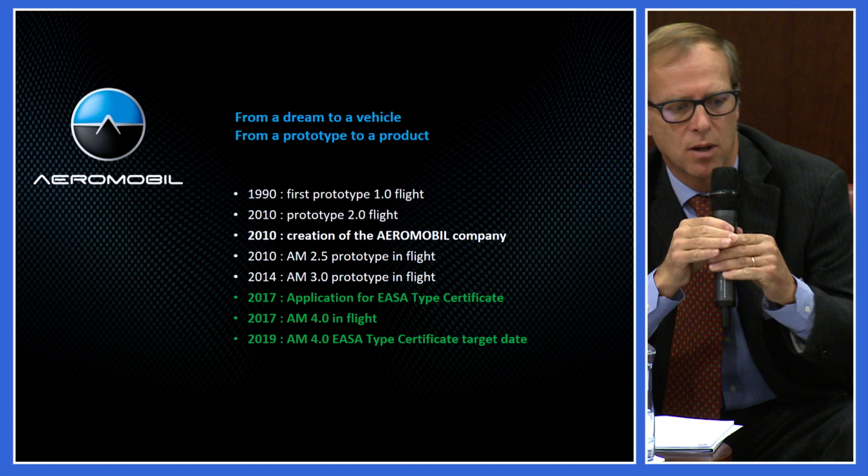The vehicle you've seen on this video is model 3.0, which flew in 2014, piloted by Stefan Klein, one of the creators of AeroMobil along with Juraj Vaculik. Technology means complexity and time.

As you can see on this slide, AeroMobil has a lot of innovation. It started with a dream from Stefan, which became a prototype, and then a few prototypes. All of those prototypes flew, the first one in 1990. They then built a new one, and in 2010 decided to create a company, turning the dream and prototype into a product for the market.

2010 was a very important date for AeroMobil, the creation of the company. Then they designed new prototypes. What would be the future? AeroMobil is designing a new, improved version of its vehicle. Next year we will apply for the EASA type certification, and have a new prototype in flight. We intend to obtain the EASA type certificate in 2019.

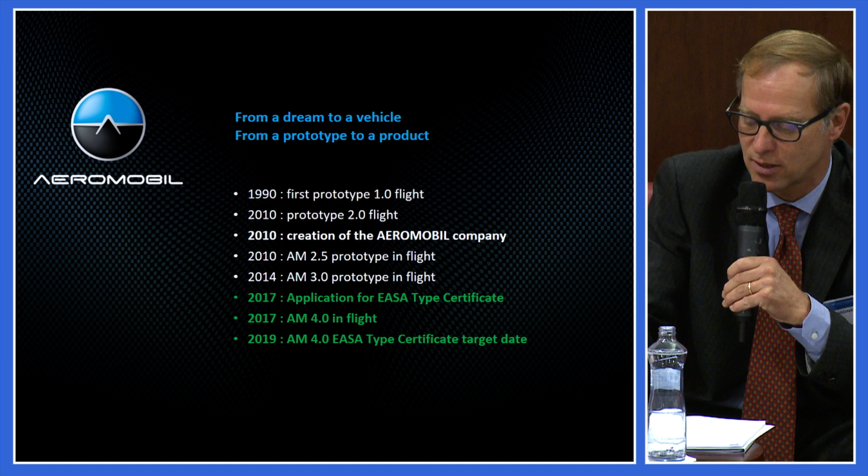This project is a challenge. What are the main challenges for AeroMobil? First, we need to obtain homologation as a car and type certification as an aeroplane.

This means two sets of regulations, perhaps some inconsistencies, but also in some cases, perhaps some good ideas from one side or the other.

We also need a propulsion system for the road and a propulsion system for flight. This is not easy. Controls are a big issue because the driver and pilot remain in the same seat in our design. In front of that seat you must have the classical car controls found in all cars, and also the classical aeroplane controls found in aeroplanes. This is a big challenge.

Aerodynamics is complicated because of car regulations, since the length of the aeroplane is limited. All the aerodynamics specialists in the room will understand the difficulty of designing what I could call a short aeroplane. It's a big challenge on aerodynamics. Simon and his team perform very important work on that.

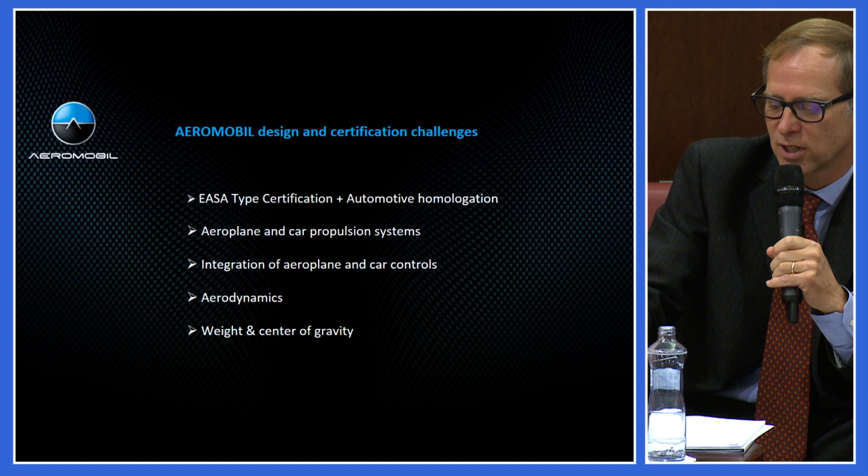Last but not least, weight and center of gravity. On a car you've got four big wheels and very nice brakes, but this is weight that isn't useful for the aeroplane. The center of gravity is also a big challenge, for both design and certification, because we will need to make proposals for the certification.

The AeroMobil 4.0 is a European light aircraft of category 1, which in the EASA procedure should allow some alleviation in the process. We will use the future CS23. The NPA has been published this year, and the new rule should be published by EASA before the end of the year. That's the schedule.

We will use this rule, and we'll be one of the first projects to switch from the old prescriptive rules to the new rules based on safety objectives. This is very important for us because with this new rule we have the possibility to propose means of compliance to EASA, and EASA has to accept.

EASA remains the boss. For example, for occupant protection or fuel tanks, the automotive requirements are more severe than the aeronautical ones, so we will propose to EASA to use those automotive requirements for those two subjects. Using automotive requirements for aeroplane certification, we should still meet the EASA safety objectives defined in CS23 Amendment 5.

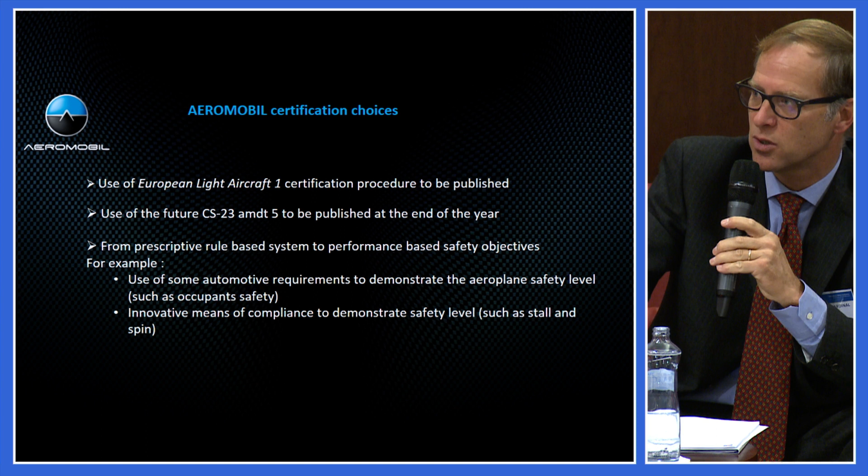This new rule will also allow us to propose new means of compliance in other fields, such as stall and spins. In the new rule, you concentrate on the safety objective, and the main case you have to study is the stall during the last turn. We will concentrate on that, and this new rule will allow us to propose means of compliance.

The objective of an aircraft manufacturer is to design a good product. What is a good product? It's a product that the customer likes and that is safe. Obviously an aeronautical manufacturer will not produce something it doesn't believe is safe. For us, minimizing certification costs does not mean minimizing the safety level at all. But we have two kinds of tests.

We perform a lot of tests during development that are not part of the type certification in order to have a good and safe product. And those tests, we perform them as we want.

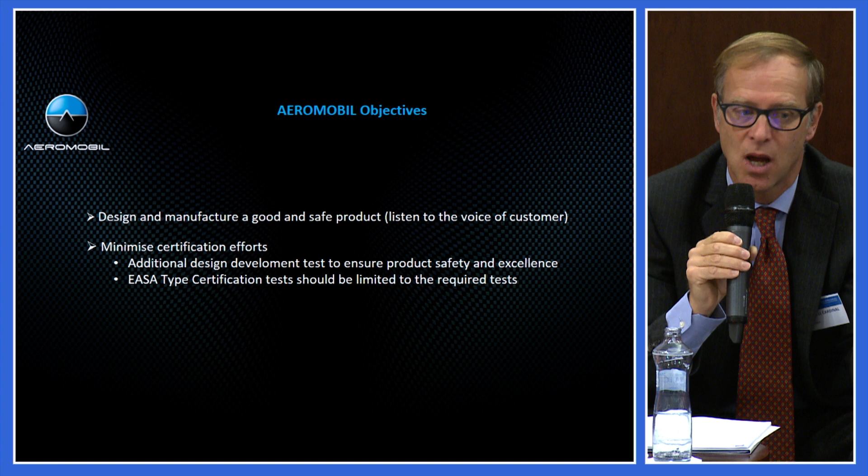When we perform a test during type certification, you need to have the test program approved. Sometimes you need to have the witnessing of the authority. Just be convinced that for us, minimizing the certification efforts does not mean reducing the safety.

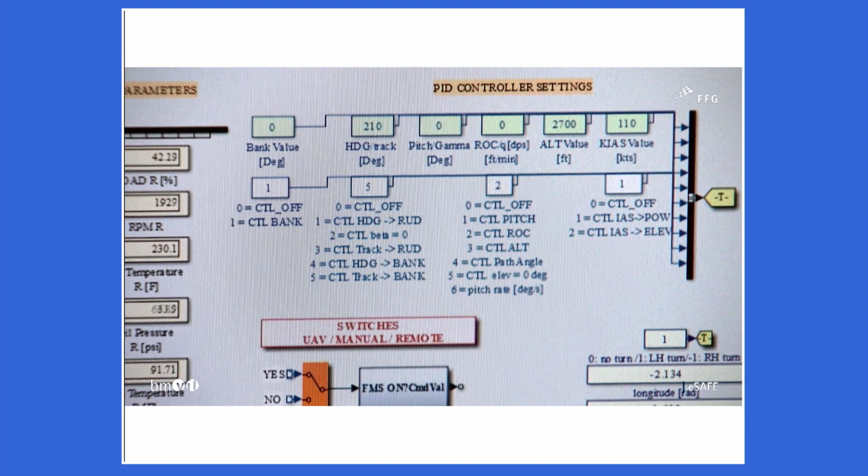This software contains a database which is used to calculate the flight route and takes decisions based on these calculations.

We're now working on developing a cost-effective and certifiable solution suitable for serial production. eSafe is a further milestone in the quest to raise safety levels in a time of constantly increasing mobility.

Okay, thank you. We see the assistance systems just a road down. We start with the human pilot, and of course the next is a regular normal autopilot with a limited authority. Then we already have envelope protection systems, and this is already real in general aviation, and of course eSafe is just

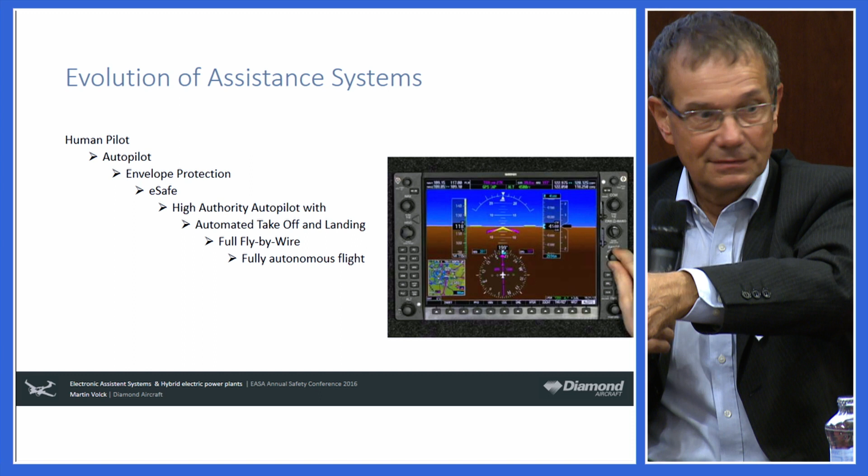Hybrid electric power plants. The idea of electric flying is not really new. And again, automotive industry is driving the technology. And I'd like to present another funded program that we did. It was called HEMEP. This is what the airplane will look like. The project goals were just demonstrating the technology finally, but of course as well other items.

One important thing, we have to think about the rules, what might be possible. We will be able at least to present certification procedures or ideas to the authority for this kind of airplanes.

You see the consortium. You see Airbus, you see Siemens, you see Diamond, you see some smaller partners. Those are not quite equal partners, but it works.

We take just our regular single engine 4-seater as a base for this development, and we modify this airplane. The weight is slightly higher. We still take the same diesel engine to generate the power. And one goal was we want to be able to fly at least half an hour pure electric.

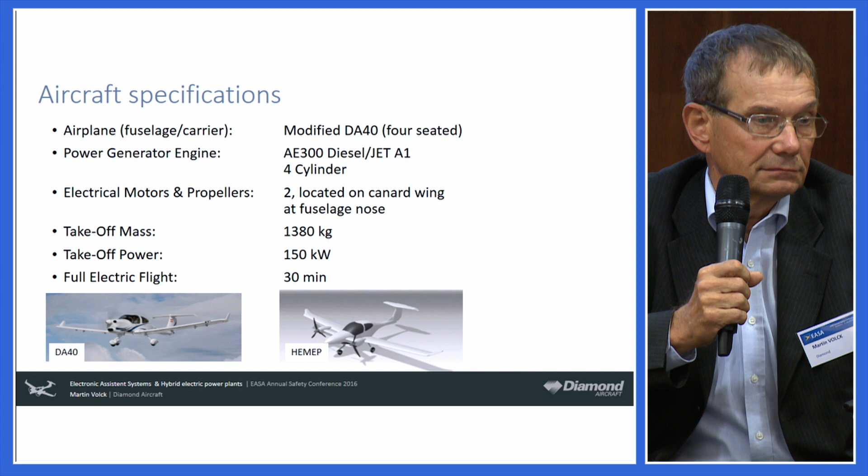We made some aerodynamic analysis. The title was multi-engine electric airplane because it's not quite clear how many engines the airplane has. And we looked at different configurations, including the prop effects and everything. And finally, we picked the first one. We thought about having 6 engines, but it's not so easy to install 6 big propellers on a small wing.

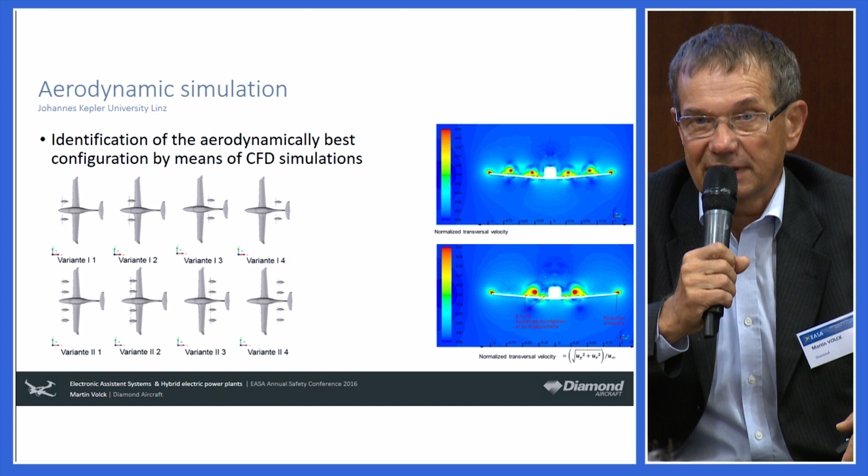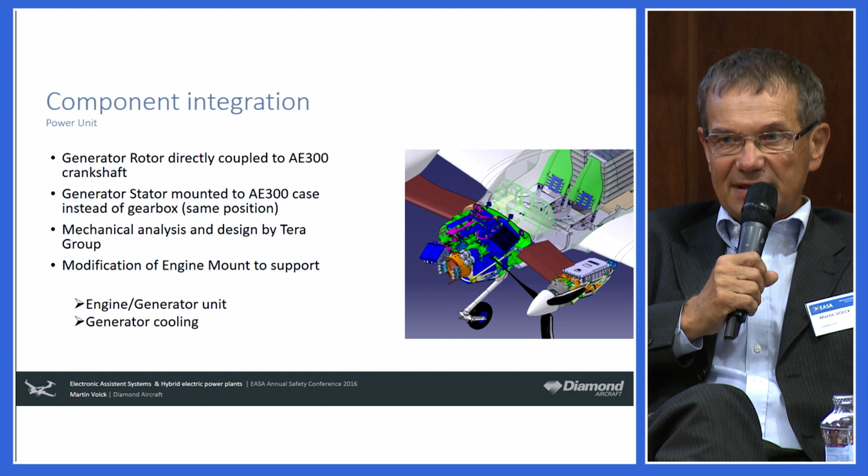And all the hybrid components are located close to the engine, just in order to have low impact on the original airframe. And only the batteries are where originally the passenger seats have been. You see the generator is directly coupled to the crankshaft of the diesel, and the engines and the electronic converters are in the engine nacelle, which is on a canard wing configuration.

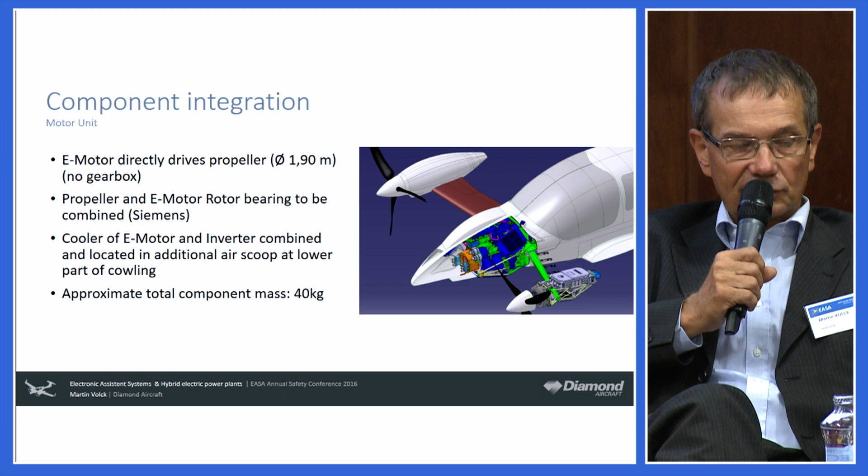Batteries, Airbus. You know, lithium batteries is one threat in aviation, and Samsung phones is another one.

Anyhow, the batteries are contained. We have to contain them. If one cell fails, the fume just goes through a chimney-like element. And the design of the battery modules is that if one cell burns, it does not take the others with them. That means if we lose one cell, it should not ignite the others. This is just the concept.

The individual module, I think it's 14 modules. One module is at a low, acceptable voltage, meaning you can handle it without exceeding dangerous voltage. But of course the voltage of the whole system is high, close to 800 volts, and this is a real challenge to deal with those high voltage levels. But our partners insisted on these high voltage levels.

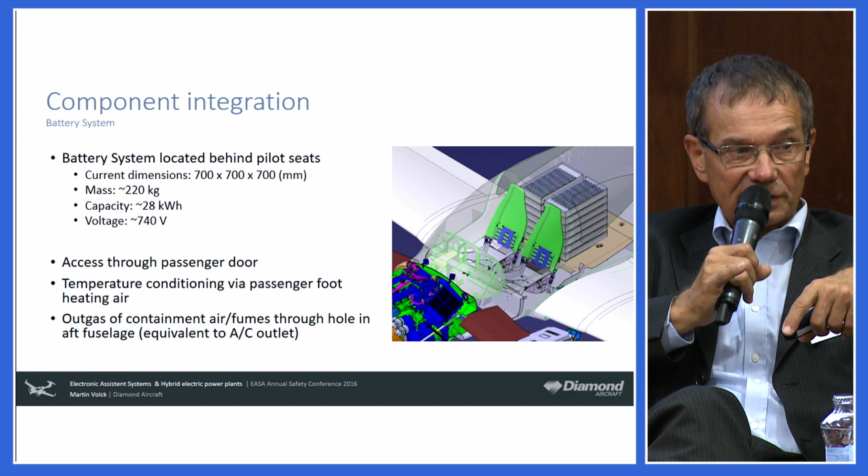I think it's at least a base for discussion. Thank you.

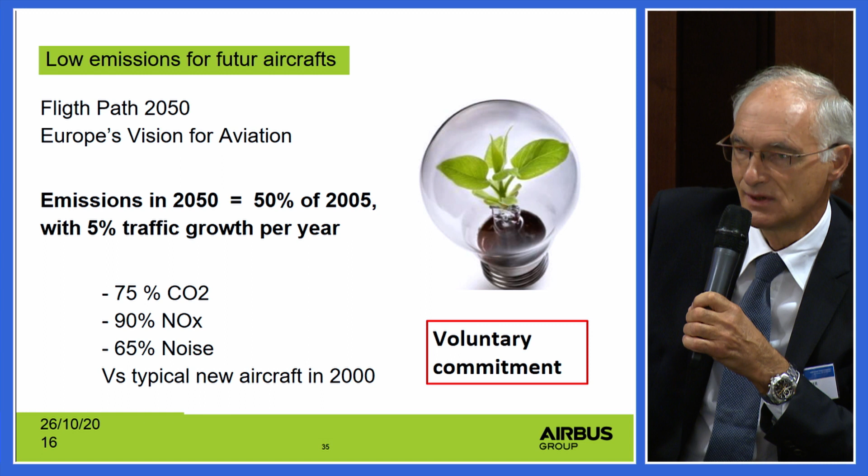Not easy to achieve. And what we realize today is that traditional technologies or solutions fall short of meeting this objective.

When dealing with CO2 emission alone, for example, we can count on 20 to 25% improvement due to more efficient airframe. And when I speak of airframe, I speak of lighter airframe, but also some refinement in aerodynamics. Air traffic management improvement may bring another 5 to 10%. New efficient engines, 15 to 20%, including new concepts like the open rotor being developed. And alternative fuel, I mean biofuel - subject to whether they can be produced, which is another problem - may bring another 15%. But when you add that up, it's still missing 10 to 25% of the objective.

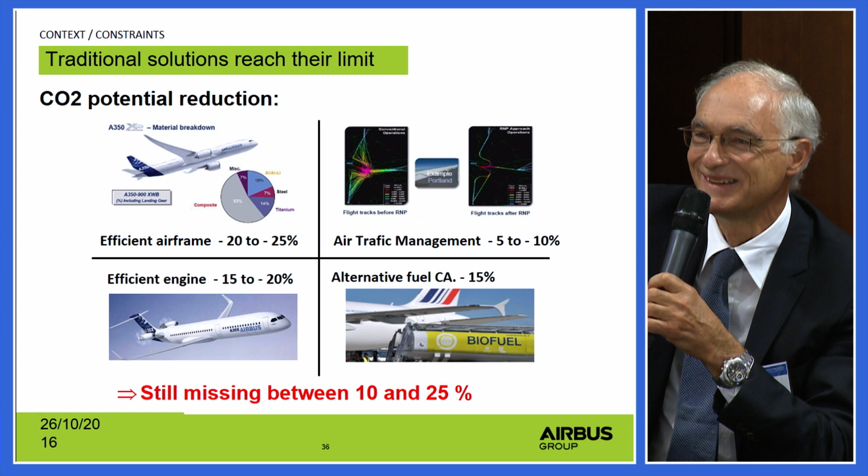So what do we do? Clearly we need something else. We need a disruptive technology. And we at Airbus believe that electrical propulsion can be this disruptive technology. Why? Because obviously it's clean, at least during the flight. And it allows new architectures of propulsion systems, of aircraft architecture, that may be more efficient.

However, there are some prerequisites before we can really apply this to large aircraft. This is to make progress in the efficiency of the power generation system or energy storage system. Today, to give you a feeling of the gap, there is a factor of 20 in the energy-specific weight of fuel cells, battery cells, versus fuel. It means that, for example, 10 kilos of fuel equals 200 kilos of battery cells in terms of energy content. So you see there is still a long way to go.

And in fact, this is today limiting the application of battery cells to small aircraft and short-haul transportation, because when you increase the range, you end up spending all your energy carrying the battery. So in practice there is a limitation on the range and endurance you can achieve, which is quite small. So there is potential, but today there is still a lot to do to achieve the required level of performance of those systems. And even if you extrapolate what is in research laboratories today, we see it's easy to improve by a factor of 2, but beyond that, it's still something undefined.

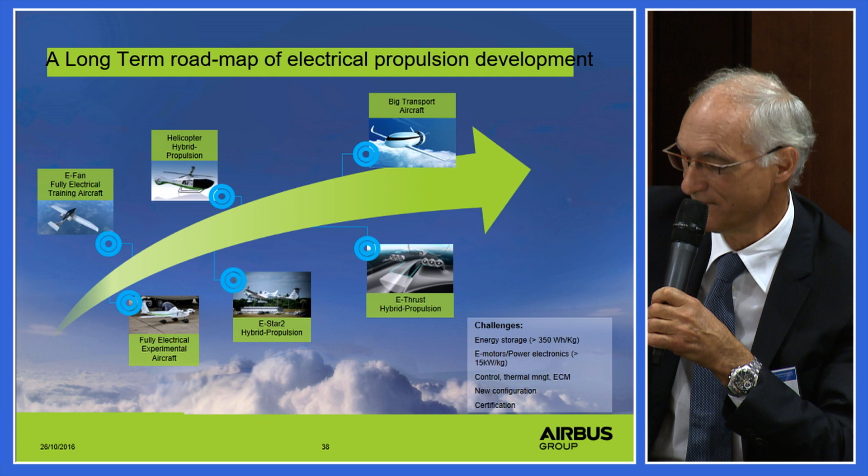So now that I explained that we are following a roadmap with several steps, let's speak of the first step, which is the E-Fan family. Family, because we have already 3 small aircraft in this category, exemplifying our very pragmatic approach.

We started with a Cricri back in 2009, and it was the first attempt to convince ourselves and convince the public and our internal staff at Airbus that yes, electrical power can be used on aircraft. So to go fast, we took an existing aircraft, a Cricri, and we just changed the thermal engine to an electrical engine. That was all we did. But already this allowed us to get acquainted with how to use those electrical systems.

The second step was a real demonstrator, and then we took care of designing a complete aircraft, not just taking an existing one and modifying it, but optimizing it for the electrical propulsion system - that was the so-called E-Fan 1. It was a demonstrator, so it was not certified, no production. However, it was already looking like a real aircraft, and it allowed us to demonstrate interesting operational performance, interesting characteristics regarding very low emission and especially very low level of noise. And it was a further step to convince that yes, there is a future in applying electrical power on aircraft.

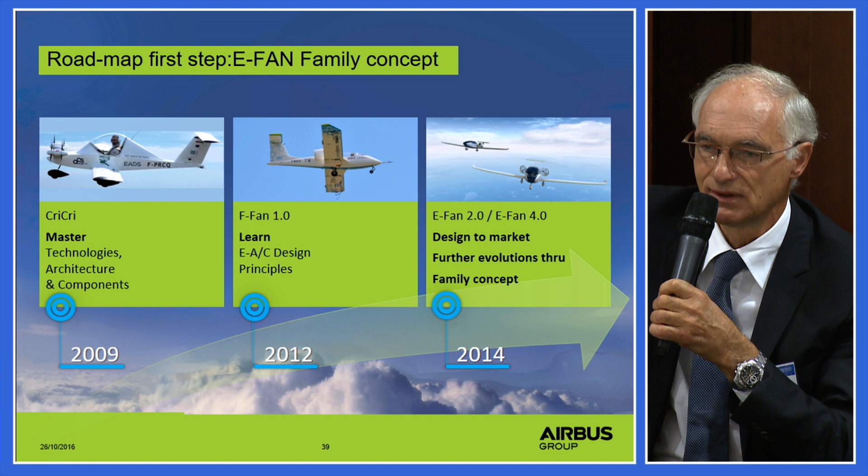So I will give a very short description of the various aircraft. The first one was the Cricri, and it was a very small aircraft, max takeoff weight 185 kilos. That's almost incredible that you can end up with such a low weight.

So we just changed the propulsion system. We went to 4 electrical engines. Why 4? It was a question of cost. We needed 22 kilowatts, and the easiest and fastest way of using COTS was to use 4 engines. Given the max takeoff weight constraint, we could allow only 26 kilos of battery cells, which was allowing something like 20-25 minutes of flight, but enough to demonstrate the capabilities of the aircraft. And in fact, we achieved the same level of performance as the original aircraft with the thermal engines.

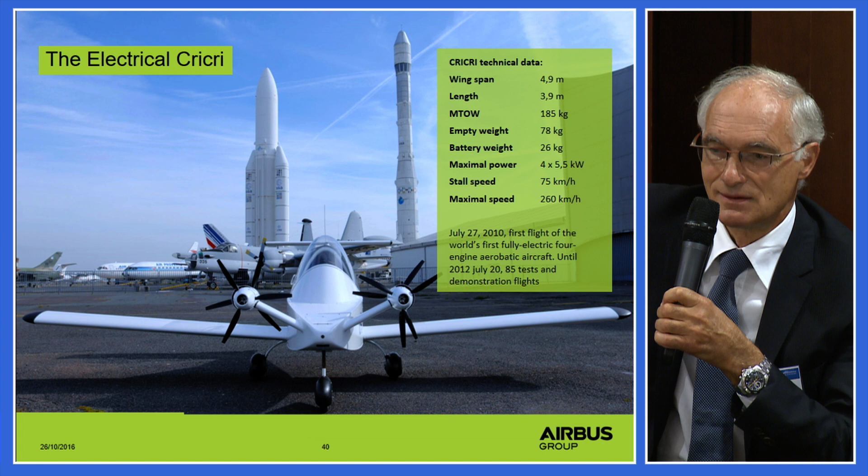Why a fan? Because we wanted the aircraft to be very efficient in terms of noise limitation, so a fan is good for that. Why 2? It was also a question of integration of the aircraft, it's easier to integrate 2 fans than 1, and a question of costs. There were a lot of choices in the 30 kilowatt category, less in the 60 kilowatt category, so that led to this choice.

And on the aircraft we had 170 kilos of battery, giving an endurance of about 1 hour. This aircraft crossed the channel last year successfully, and that was the culmination of the career of this aircraft.

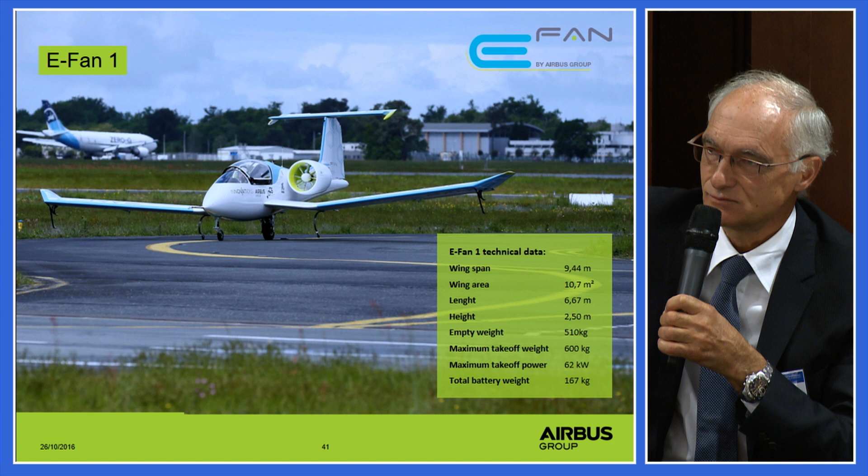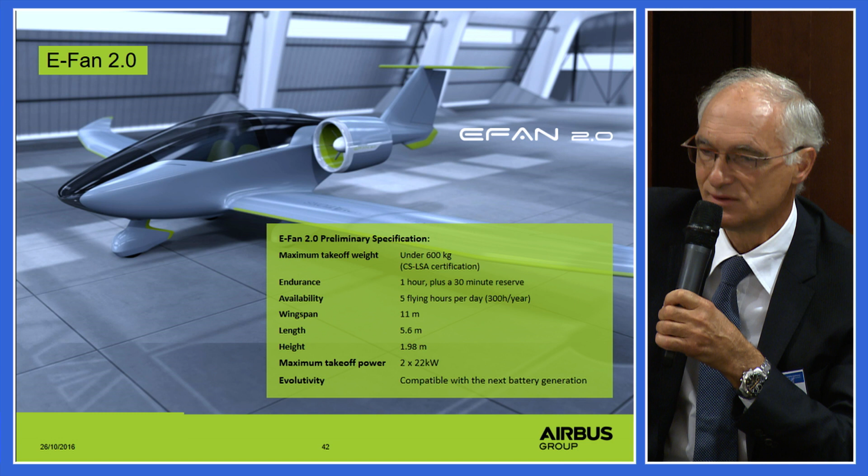Anyway, as I said, it allowed us to acquire a lot of data, and those data are now used for the design of the E-Fan 2, which is a true production program. Rather than going through the characteristics on this chart, which are quite preliminary since we are still optimizing the aircraft and still in the design phase, I will explain what we are looking for with the aircraft.

First of all, I have to say that we are not alone, we are working with Daher Sokata. They are responsible for the design of the airframe itself, and we at Airbus, as the overall contractor, are in charge of the electrical propulsion units. This is where we want to acquire real experience.

Our target is really to answer to a market need, so we do a design to market. We design the aircraft specifically for its role of initial training mission. The mission we are targeting is 1 hour plus 30 minutes reserve. It has to be attractive, so good performance, and it has to be environmentally friendly.

It means that it needs to have no emissions, and especially very low noise, allowing it to help training schools and aero clubs to face the difficulties with their neighbors and the complaints they have on noise, and forecasted limitations on use of aircraft close to cities, especially on the weekend.

A secondary target, which is very important, is to achieve business and operational objectives. We really want this aircraft, it's a real program ending with production and operation, to stand by itself and be profitable. It has to bring to the end user a significant cost reduction with respect to current aircraft. Our target is 20% reduction of cost of ownership versus the existing aircraft.

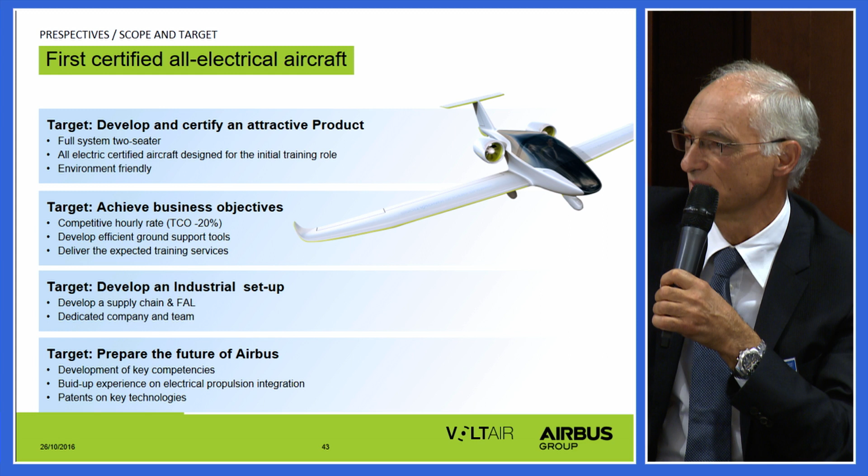Obviously we are not doing only that to prepare ourselves. There are other programs like developing a distribution system, an electrical distribution system for high power, and we are also working on how to develop hybrid systems on larger aircraft. But that was not the purpose of this presentation.

Thank you for your attention.

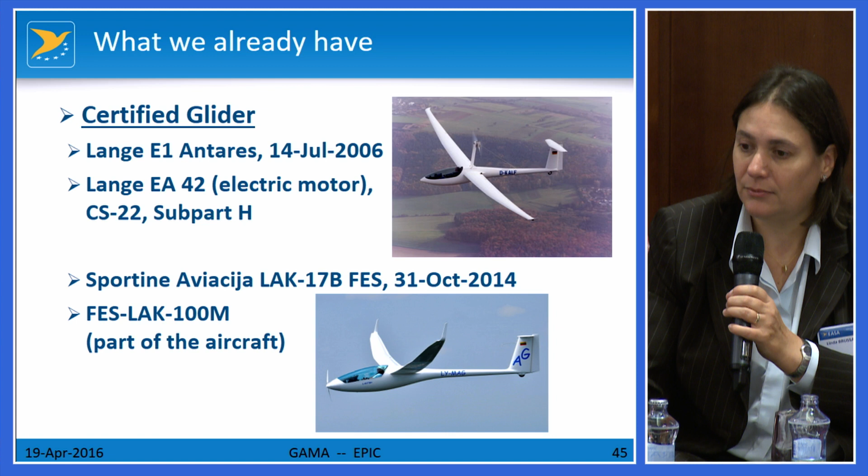And then of course we also have some future projects. What already arrived is the E-Fan, which was just presented to you in much more detail. Airbus Voltaire already applied for certification in early 2015. So we are already involved in that, and it's for us also a very interesting concept technically, and also to see how we can support this kind of aircraft to get its certification.

Of course, we also speak with other manufacturers, and what we see on the radar is hybrid airplanes combining different ways of propulsion, some electrical aircraft, on-demand mobility, and much more is coming, I hope at least, in the near future.

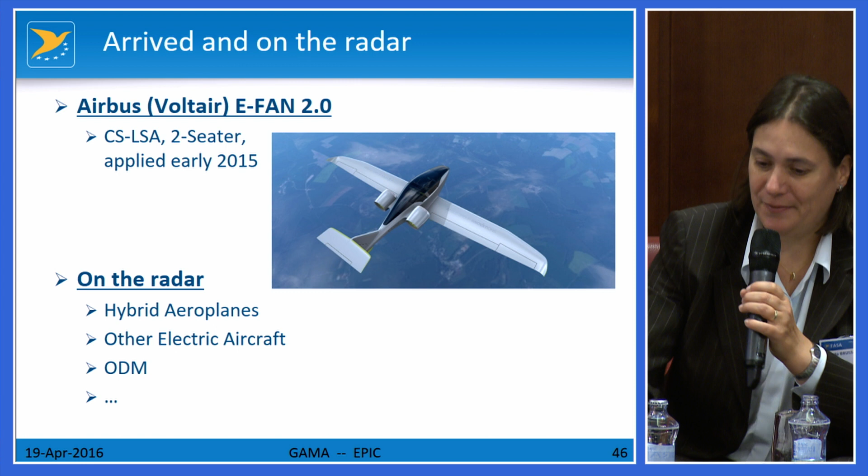Actually, when new technologies emerge, we look at our requirements and realize we didn't think of that before, so we have to do something. Internally, we started up a project to see how we can incorporate electrical propulsion into our current regulations.

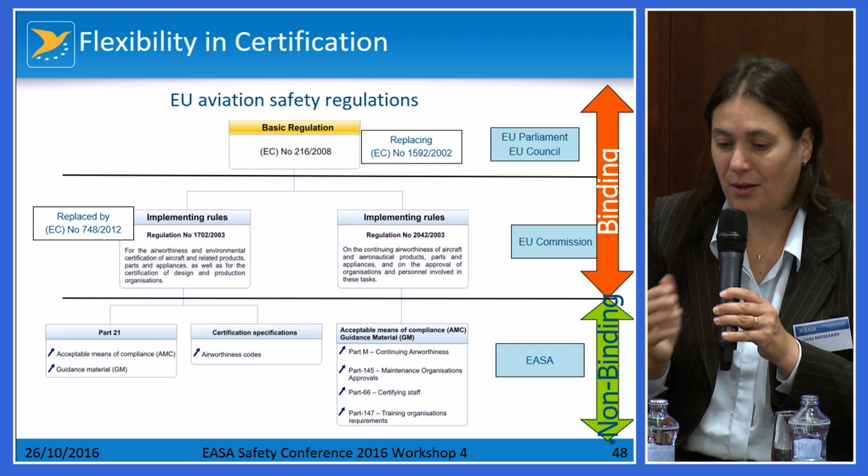The title is Flexibility in Certification. I'm not sure if this really is flexible, but it's an overview: we start with the basic regulation, which puts EASA into place by the Commission. Then we have the implementing rules like Part 21, and under that the non-binding rules like the AMC to Part 21, CSs and all other ones. I'll go quickly through this, it's too boring anyway.

So we go to the real flexibility in certification. What tools do we have today to make things work for you? Of course, special conditions - I know it always sounds a bit scary, but it helps us set out a set of rules that really support your needs. For electrical engines, we have one special condition, which is changing, for instance, parts of CSE into things we need for electrical engines.

What we also can do is issue what's called restricted type certification. It's a bit easier to get and to get your aircraft out there to fly and gain experience and knowledge about new technologies and how they behave on the aircraft. Then there's also the option outside EASA, sometimes forgotten, called Annex 2 - microlight, experimental aircraft, research aircraft. These Annex 2 approvals are handed out by your own local authority, which makes things easier since they are more local to you than us, so it should be quicker for you.

We also know that CS23 is being revised at the moment. The NPA was already mentioned, it was published earlier this year, and we received a lot of comments.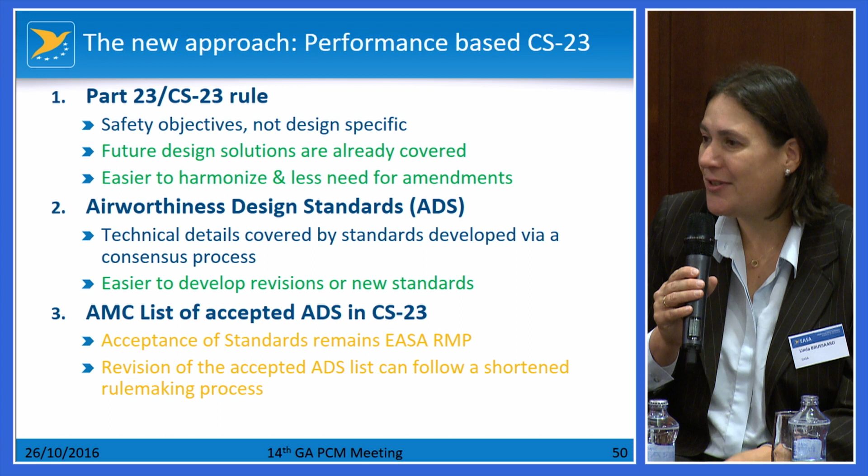It's a quite challenging objective that we have, because we don't want to be prescriptive anymore about how to design, but we want to give safety objectives. In order to give safety objectives, we also enable new technologies. From your perspective, if you stay with what you know nowadays, you don't enable the emergence of new technologies.

So there's a lot of information there you can use, and as usual with AMC material, you can also propose your own means of compliance to us. It makes things more flexible, really.

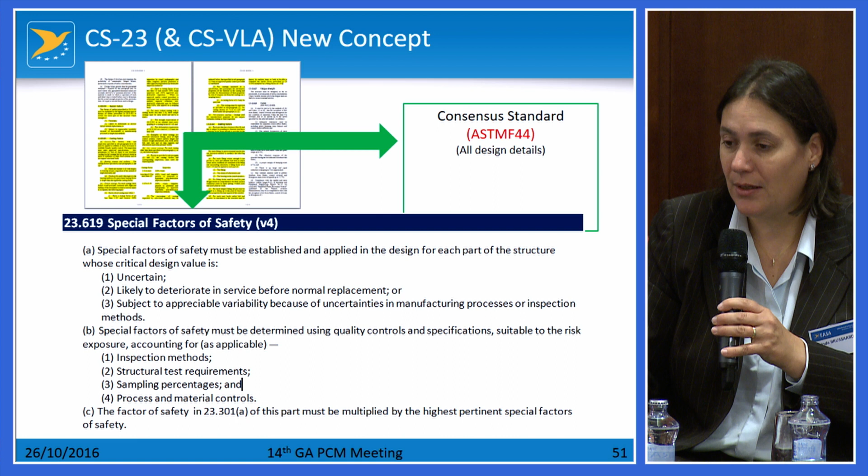Next to that, we are also looking into Part 21 with proportionality. What does that mean? It's again to introduce flexibility at the smaller end of GA, where we want to look into what's the risk of the aircraft and how we can still achieve an initial safety level, but also help you get your product out there without being bothered too much, while still being safe.

So the scope is, within a certain boundary, to get gliders, LSA, and small CS23 aircraft certified together with qualified entities and national authorities, which are closer to you and make communication easier, to get your product designed, produced, and certified. We're trying to enable everything needed to make new technologies easier to introduce on CS23 aircraft.